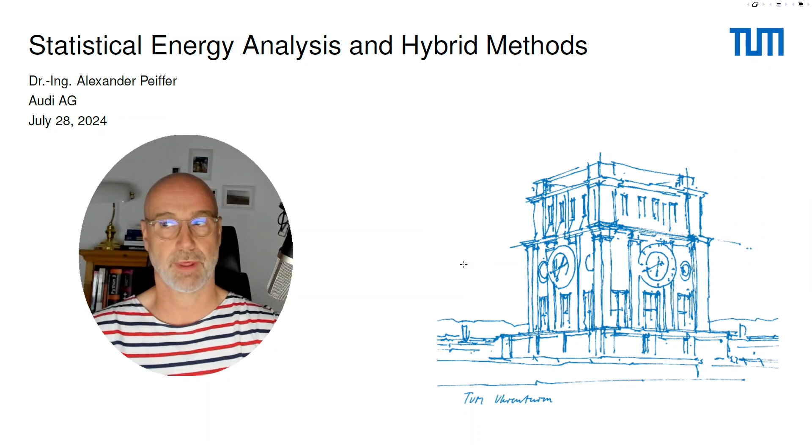The first session is about the introduction and the motivation. So why are we doing this? Why are we using SEA? And why are we using the combined version of hybrid FEM-SEA? So before we start and to get the full picture, we have to talk about the acoustic design process. So what are the goals of an acoustic design process?

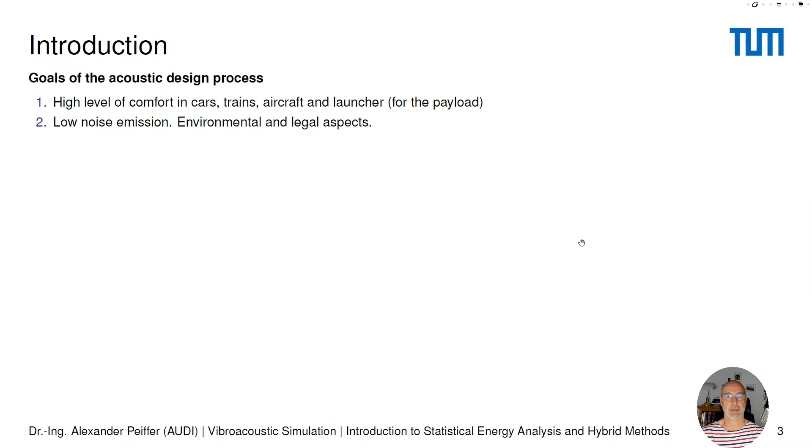So first of all, we would like to get a high level of comfort in cars, trains, aircrafts and launchers, in this case mainly for the payload, namely a satellite. We have to target to design low noise products for emission to the outside, to the environment, and to achieve all the legal limits that we have for specific noise sources.

But, and that's a very important thing in the daily business of a technical acoustician, we have to solve a target conflict all day. Target conflict between acoustics and many other disciplines like cost, weight, space and design. And the reason is that all the other disciplines have, let's say, a competing view in terms of what we need. Good acoustics needs heavy layers, needs space, needs some soft foam material somewhere. All those design decisions that we take are in competition with the other disciplines. So in the design process, we have to communicate with all the others and discuss what is the best solution for the product as a compromise.

Vibroacoustic simulation, what is that? Here's a try for a definition. Vibroacoustic simulation is the discipline of modeling and predicting the acoustic waves and vibration of particular objects, systems or structures. Why do we perform simulation? That's the other big question and the first step into the simulation that will be shown later in the lecture.

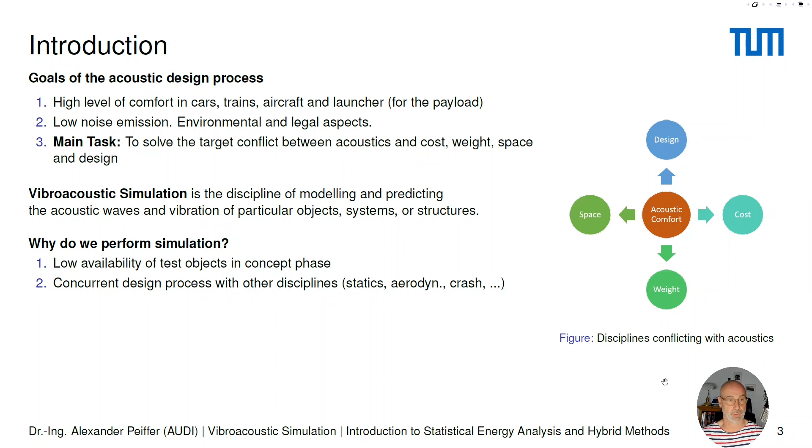Obviously, in the very early design phase, we don't have any test objects. So at that phase, the only choice that we have is to perform first guesses, estimations or predictions about the acoustic performance of our product. Other disciplines are doing the same. Statics, aerodynamics, crash, they do simulation in the early design and layout process. So first of all, we can use those models for our topics, but we also have to give answers to specific questions.

And third, the design and evaluation of noise control can be done by simulation. What is the impact of a new treatment, to use more mass, more space? What is the impact of a new thickness of a sheet of metal or a new beading pattern? And this can be done by using simulation.

And last but not least, a better understanding of tests. Because a test cannot measure everything, and if we have a test performed and at the same time the model available, we can get a much better insight into the phenomena that happened in the test procedure. Finally, we perform simulation to improve the product, but also the design process itself.

And a big but, especially in my experience, simulation will never replace all tests and/or engineering judgment. There's often the statement of zero prototype development. This might be possible in specific disciplines. My personal opinion is that in vibroacoustics, with the complex systems that we have, we can tremendously reduce the number of prototypes, but we will not be able to completely design or develop without any prototype.

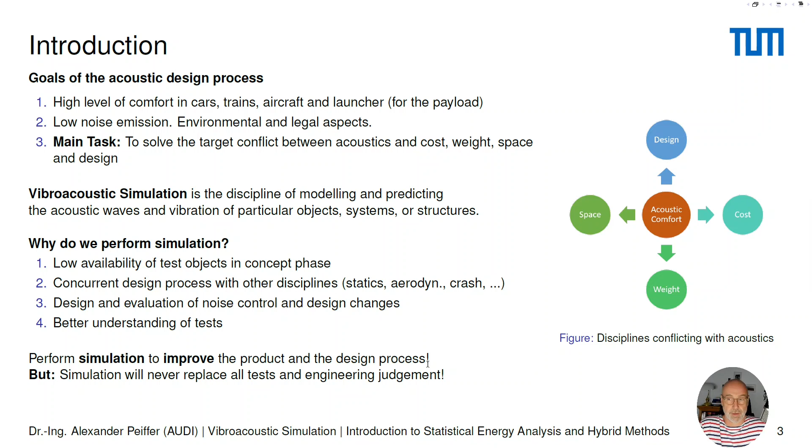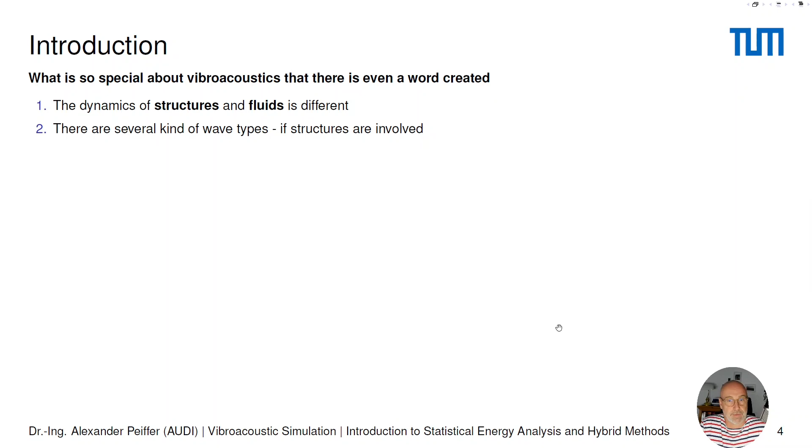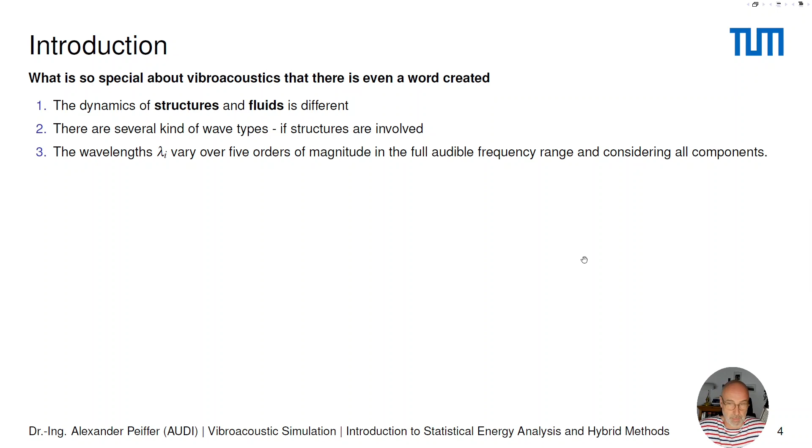Okay, what is so special about vibroacoustics that there's even a word created? One specialty is that the dynamics of structures and fluids are different. So we have a completely different physics behind the wave phenomena in such structures. That leads to very different wave types, especially in structures. You have bending, torsion waves, in-plane waves, and so on. They have a completely different speed of sound. This leads to a different wavelength, which might vary over 5 orders of magnitude in the full audible frequency range, if we consider all kinds of components that we might have, glass, foam, soft stuff, and so on.

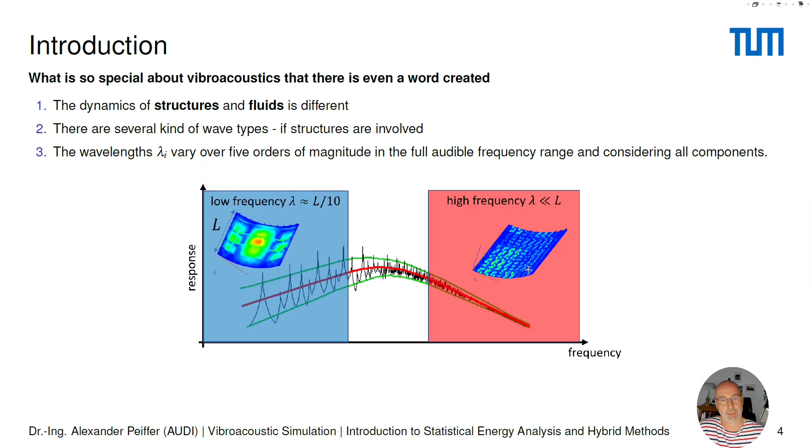And at the same time we have a mid-frequency area where we have kind of a mixed area. So this is a transition area where the transition takes place from the modal behavior to the random behavior. This very high frequency leads to modes that are very near to each other, and this is why we can identify peaks, but they are overlapping here a little bit, leading at the end of the day to a varying but smooth curve in the high frequency range.

So what is the consequence of this? All those different regimes of the frequency range require different simulation methods.

And this is one part of the lecture, because in the lecture here, wow, there's an ant.

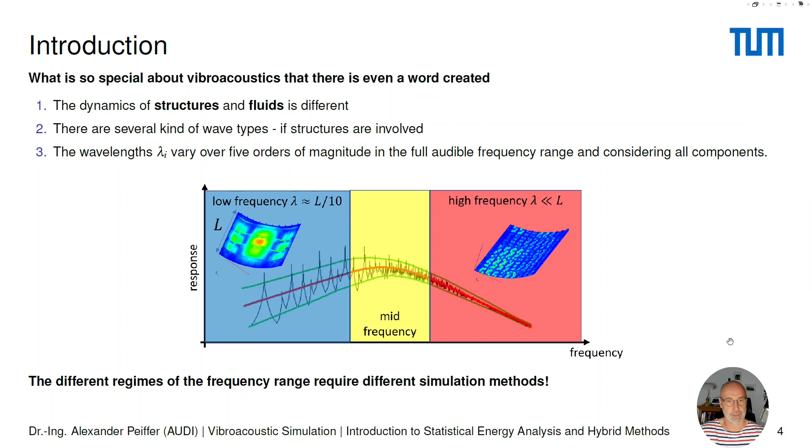So in the lecture here, we will mainly deal with the yellow and with the red area. So to further argue on this, I will show you some examples. One well-known example is the test campaign from Bob Bernhard, who took 98 trucks, which are supposed to be nominal vehicles, and he took them out of the assembly line.

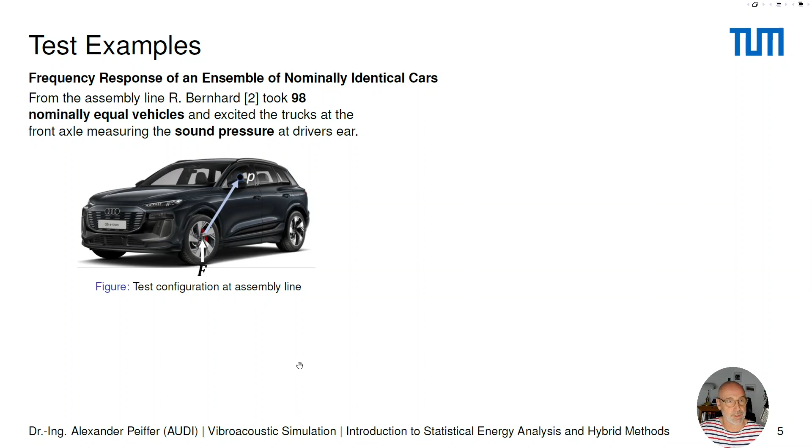And he measured the force at the front axle and at the same time the pressure response at the driver's ear. I don't have the original figure, so what I've shown is a reasonably recently developed car from my company, but in the original I think it was a Ford truck. First of all, he repeated this experiment on the same car several times, at different times of the day, different environmental conditions, temperature, and so on.

And what we can see is that here in the low frequency area, the variation is quite low. But in the high frequency, we already get a variation of our response. So that means the response of the car changes during the different experiments. When he did the same experiment with 98 different cars, this leads to a much higher variation, also in the low frequency range, but to a very high variation in the high frequency range.

So what is the consequence of this? The consequence is that even a similar object, which was supposed to be equal, leads to completely different or strongly varying responses, especially at the high frequency range. So whenever we perform a simulation, which of those 98 cars should we take? That means that in the high frequency range, it doesn't make sense to predict the specific representation of this ensemble of cars. We should take an average and at the same time have a look at the variance of those results.

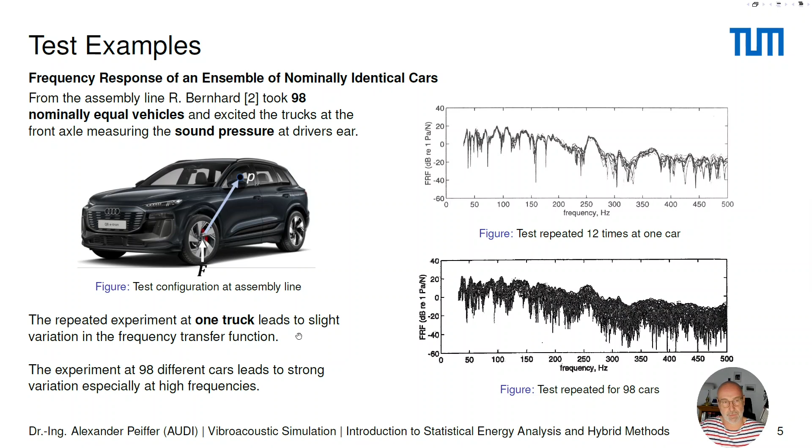A further experiment in this direction was the famous beer can experiment from Fahy. He took a much simpler object than a truck. He just took empty beer cans. To get them empty, I like this formulation, they had to be carefully opened and emptied. And this is not the original figure, again, this is just a similar representation of this ensemble. But I think beer cans don't vary too much between the United Kingdom and Germany.

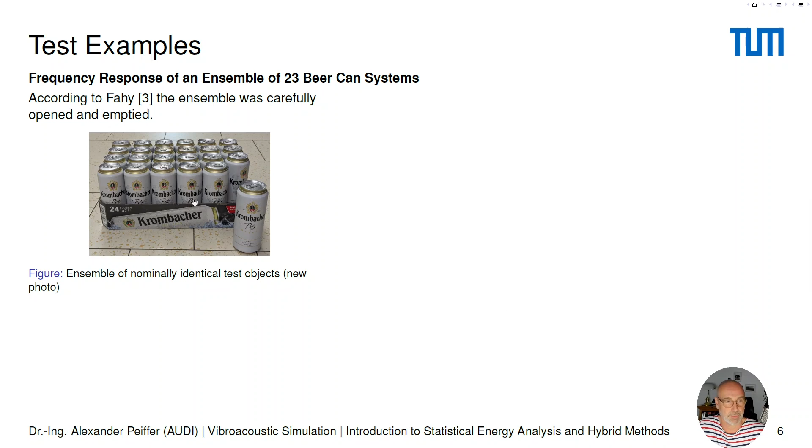The first step in the experiment was to perform the same experiment again on one beer can. And here we already see that there is also this variation in the result, even though the test object is not changed. And that's an important point, and Fahy would like to emphasize that. He said that this was definitely not due to the alcohol inside the can that had to be emptied or potentially drunk. Good.

The same experiment was done with the remaining 23 of this famous ensemble, and here again we see the variation in the beer can results. We see that we have a variation of around 20 dB across all those different cans. So again, even the simple object has a strong variation around a certain mean value, with a specific variation in the high frequency.

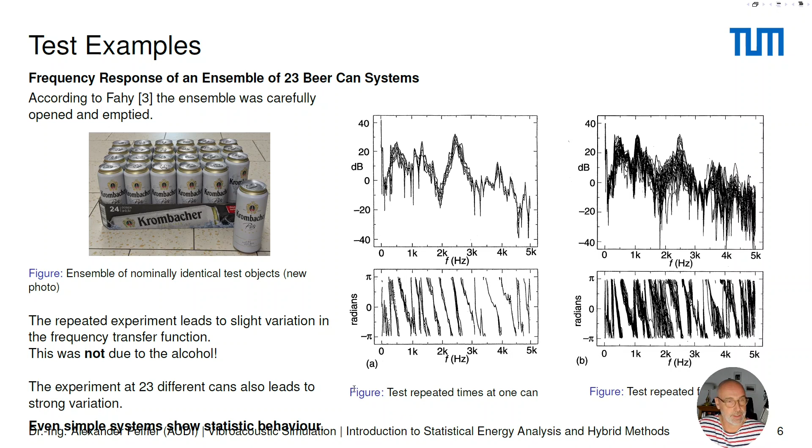So then coming to a simulation example, and this is an example which is more motivation for energy methods and not so much about realization, or let's say explanation. This is just to show you the performance of statistical methods. So just consider two kinds of models. For the first model, the setup is quite simple.

Those are 3 plates, 1 millimeter thick steel plates, and they are arranged in this configuration here. They are excited by a force, and the force is arranged in such a way that unit power is introduced. So 1 watt is introduced in this position where the arrow is denoted. This finite element model is supposed to be the reference. The elements are small enough to give a good representation of the dynamic behavior.

The degrees of freedom here are velocity or displacement. And it's a typical deterministic model representation of such a plate. On the right-hand side, you see the same configuration for a Statistical Energy Analysis, or SEA, model.

And we have here now 3 plates, and each plate is supposed to be a subsystem called SEA 1, 2, and 3. And here we have a power introduction at one specific point where we introduce the same power into the system. The degrees of freedom here in the simulation, that's energy and power introduced.

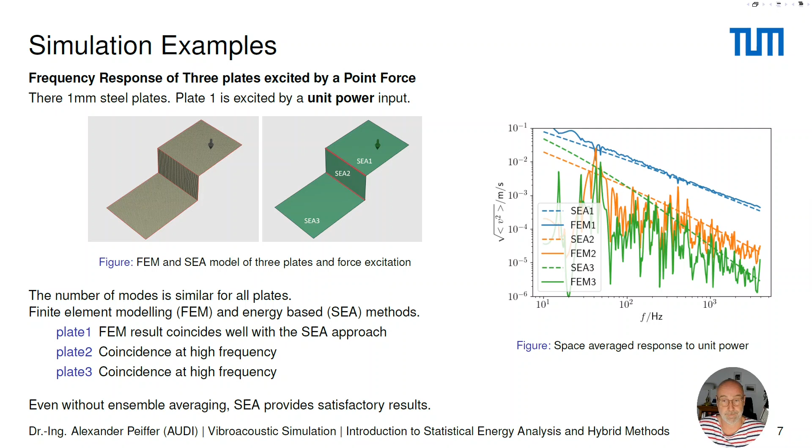Now let's come to another configuration. We take the same model, but now we replace the plate 2 by a plate that's 4 mm thick. So the steel is much stiffer now, and the number of modes is lower than in plate 1 and plate 3. In this case, we have the following effect.

That means that those plates are supposed to be random. So random methods and the SEA method should work quite well. But here, they will definitely fail because we still have the resonant behavior. And this is just to give you motivation. What is the option for that and how can this be overcome?

So for this, we take similar models as before again, which, I mean, this is the FE reference, but you also have the SEA configuration of it. But in the third version, we replace the mid plate by a finite element model. And this is what we call a hybrid FEM SEA model, because we are combining different methods. We combine an energy method with a deterministic method.

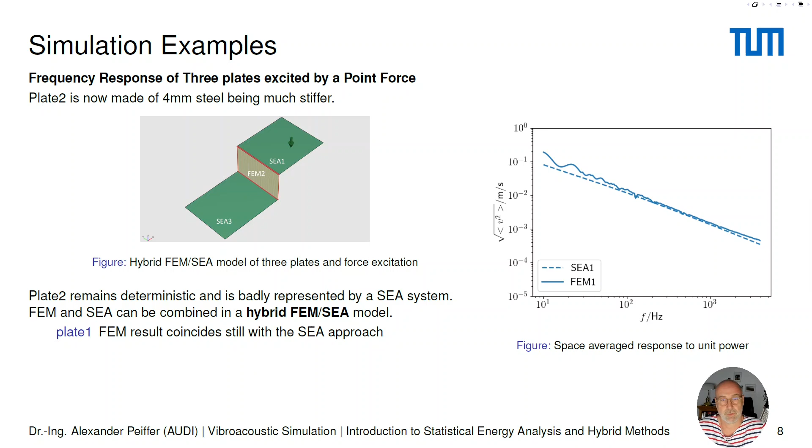So again, have a look at the results. More or less the same result as in the model before. So SEA and FEM are quite well agreeing. The reason is that this boundary does not impact the dynamic behavior of the full plate in total.

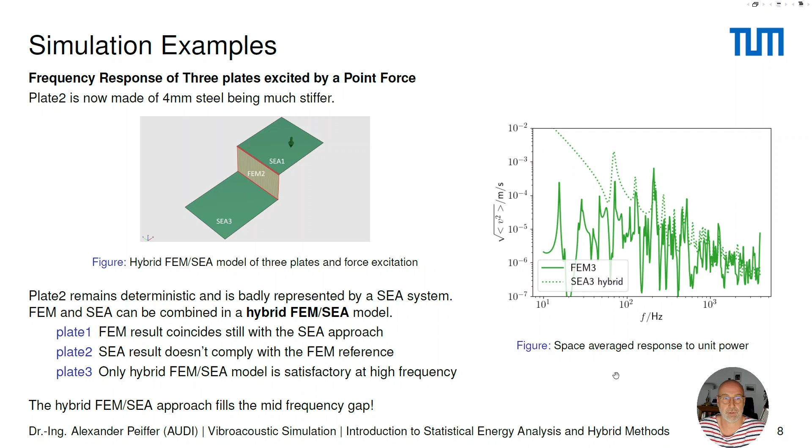This is why hybrid FEM SEA is supposed to fill the so-called mid-frequency gap, where we have no methods available, and this is why I mentioned the yellow area in the example before. So the hybrid method helps to extend SEA to lower frequency by using specific subsystems that are not yet random. Okay, so what have you learned? We come to some conclusions.

At wavelengths in the order of magnitude of system length, the system is called deterministic. We use deterministic numeric methods, for example finite element or boundary element, or if the system is simple enough, we can use alternative analytical methods. At wavelengths much smaller than system lengths, the system becomes dynamically complex, and it is called random. In this case, we use statistical energy analysis, in short SEA, created by Lyon to calculate the ensemble average of system response.

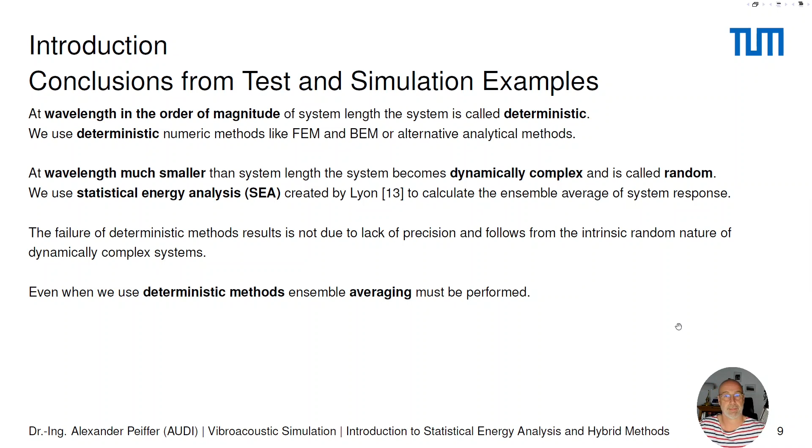The failure of the deterministic models is not due to lack of precision; it follows really from the intrinsic random nature of the dynamically complex system. So again, please remember the example from the truck. Which truck is the right model, which is supposed to be the reference? So even if we use high frequency deterministic methods, we must average. This is important, because very often high frequency FEM results are compared to SEA results, and this is not correct. You have to compare the ensemble average with the SEA result.

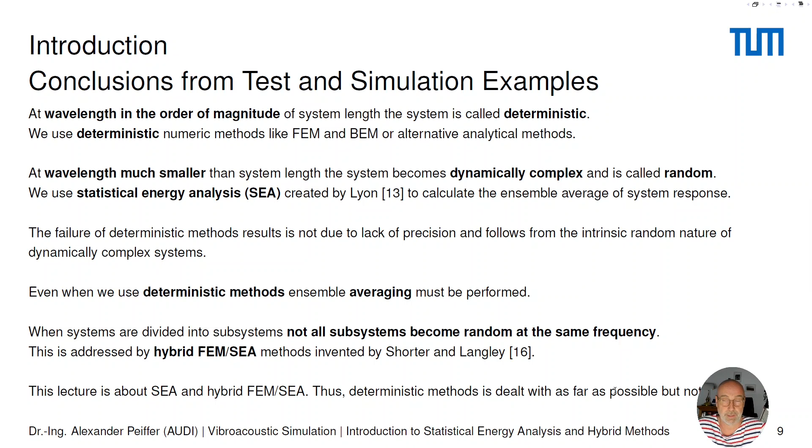When systems are divided into subsystems, not all subsystems become random at the same frequency. This is addressed by the hybrid FEM-SEA method that was invented by Shorter and Langley a few decades ago. This lecture is exactly about both methods: SEA and hybrid FEM-SEA. Deterministic methods are dealt with also, but only as far as required, not in great detail. So this is not a lecture about finite element methods.

When we look at the global simulation strategy, there are a few things to say. If we have to model the full frequency range in acoustics, we have to use various methods, as denoted in the figure. In the low frequency, we can definitely use deterministic methods like finite element or multi-body systems modeling. In the high frequency, we have to use SEA. If some systems are still deterministic, for instance a stiff fuselage panel, we have to use a combination of both, the hybrid FEM-SEA method. The right rectangle in those figures is what this lecture and all the next videos will be about.

The relevant figure that determines if a system is random or deterministic is the so-called Helmholtz number. I've shown it before. It's the ratio between the length of the subsystem and the wavelength. The higher the Helmholtz number, the more we are in the random world. The examples that I will show you, especially the academic ones, can all be followed with a Python toolbox called pyva, Python toolbox for Vibroacoustics, where you can program and try out all those examples shown later in the lecture.

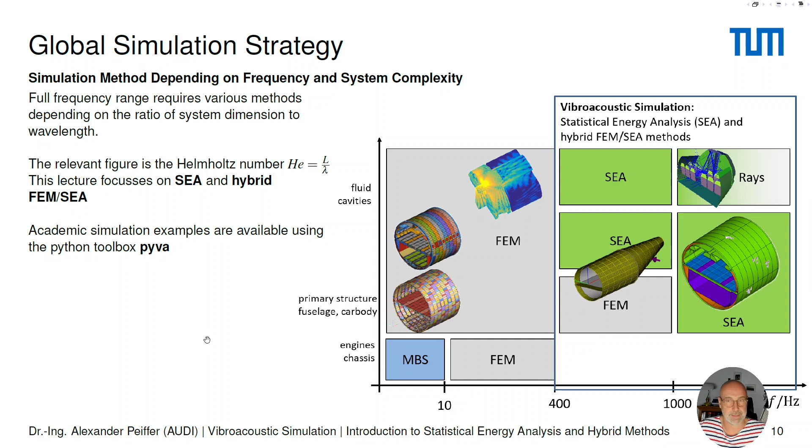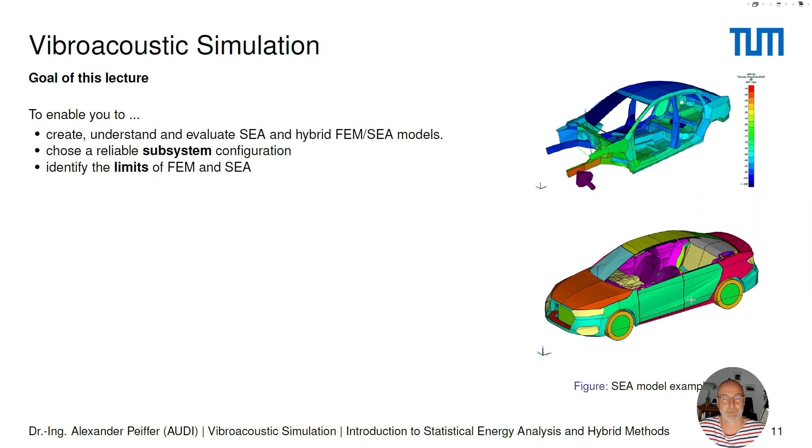What is the goal of this lecture? The goal is to enable you to create, understand, and evaluate SEA and hybrid FEM/SEA models. That's a high goal because you will definitely need some experience with such things. You should be able to create a reliable subsystem configuration. The decision how to subdivide your full car or your airplane into different subsystems is a very important decision in the modeling procedure. You should know and understand the limits of finite element methods and SEA. No method is perfect; they have specific limitations, and it's very important that you know them.

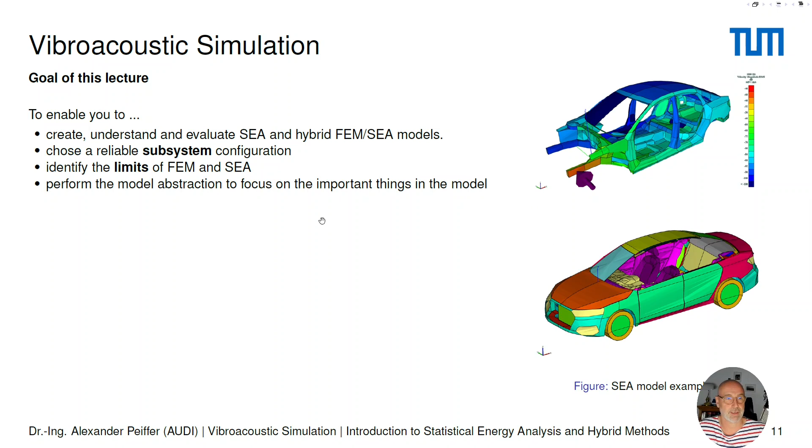And last but not least, you should be able to perform the model abstraction. So to see, okay, do I need everything? Do I need every screw? You can never model everything, and you have to identify the important things in the model. To do so, I think it's worth giving a time frame and global overview of the full lecture and the concept of this lecture.

Another thing is that the lecture is self-consistent. So hopefully you don't need any additional textbooks or whatever. Everything that is shown in the later sessions is presented and explained in the early ones.

We start with a boring thing, a very boring thing, the harmonic oscillator. Why is that so important? Because there we see concepts of energy, of damping. We can understand resonances and modes, energy in dynamic systems, and this can be very well done based on the theory of the harmonic oscillator.

We will extend such systems to complex systems of masses and springs. And at the end of the day, we will excite those systems by random signals. And that's an important thing to understand what happens to a dynamic system with many inputs if it is excited by random input.

The next two steps are dedicated to waves. We start with the simple waves, which are the acoustic waves, because there's just one degree of freedom, that's the pressure. And there we deal with sources, radiation impedance, and so on. Why sources? Because that's the way energy is introduced into our wave field. And we will see what is the relationship between the energy in the wave field and the pressure.

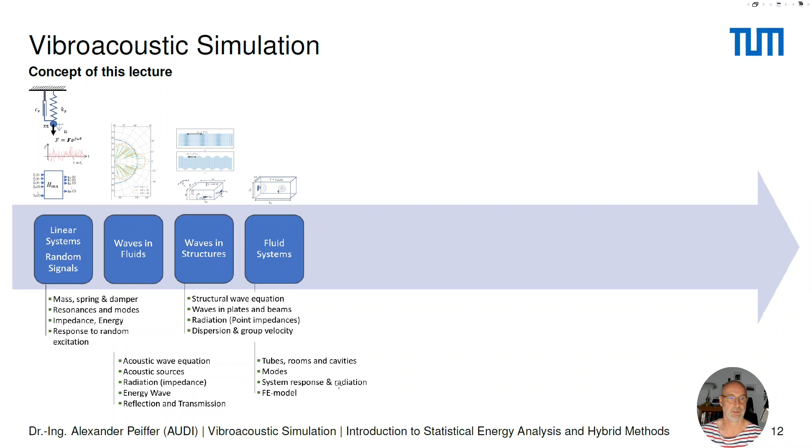We will see how modes occur in such systems, and we will derive some methods to calculate the system response and the radiation of sources into such systems, and also give a short overview of how the FE model of such a fluid system is represented. Not going too much into detail, just to understand the meaning of the matrices.

And next step, structure systems. Here we deal with beams, bars and plates, mainly plates in the lecture case. Again, we talk about modes, what is a good estimation of the modes, and we will have some simple representation of modal system responses and how an FE model of the structure would look like. Again, what is the meaning of the element matrices in a finite element model?

So when we have finished this wave and system topic, we come to random systems, which are the important theoretical construct for modeling SEA. We start with diffuse wave fields, because that's, in my opinion, the best approach to SEA, to consider a random system by the construct of a diffuse wave field.

Here we will see what is the energy intensity relationship, but also, and very important, what is the cross and autospectral density in such fields. And from all this, we will derive the excitation, and last but not least, an energy-based SEA subsystem modeling procedure. So we will first identify what is the global SEA model based on a simple energy and power flow approach.

It's nice to have one subsystem understood, but when you would like to create a full model, you have to investigate the coupling of different systems. And here we go step by step through all the different options of coupling. We start with the coupling of FE systems. Then we will see what would happen if we couple an SEA to a finite element subsystem, and at the end of the day, what is the coupling between SEA subsystems.

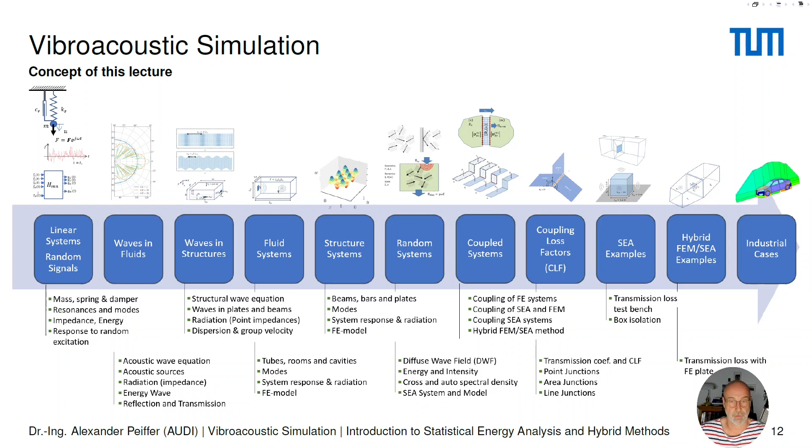And last but definitely not least, I will come to some industrial examples. So here we learn a lot about where we can use SEA in car modeling, in subsystem modeling, aeroplane setups, also specific panels. This is a mix of full-scale modeling, but also some sub-details like sidewalls or back car designs, to give you some practical examples of how SEA can be used, how hybrid SEA can be used, and what are the limits of all those methods. Good. So far for the time frame.

Some conventions and remarks should be shown. First of all, you have the convention here. Every complex number is bold italic. I like that because then it's really clarified that this is a complex number. I don't like this underscript line. So if you see something here in the lecture that's bold and italic, that's hopefully always a complex number. Bold denotes vectors, mainly geometry vectors.

I use a positive time dependence. Just a hint from my side: if you're referring to a textbook, you should always try to learn in the very early phase if it's a textbook using positive or negative time convention. That helps a lot because all the formulas look slightly different if another convention is used. When I use curly brackets, that's a vector. If it's a rectangular bracket, it should be a matrix.

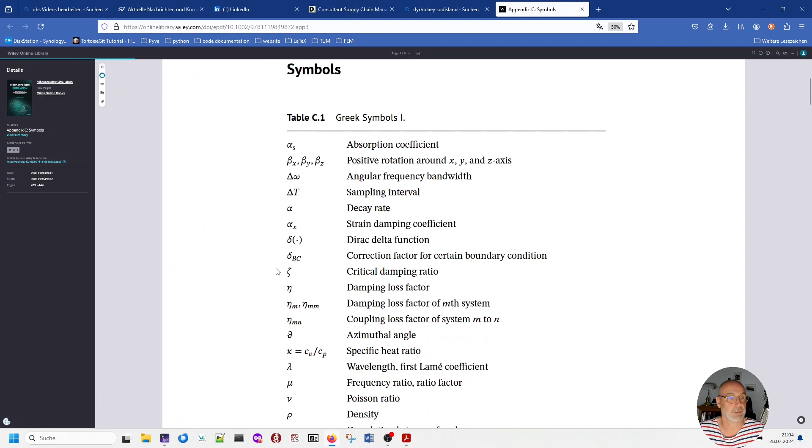You can find all the symbol conventions in the free symbol chapter of my book. So it's linked here. This is how it looks. You see all symbols are mentioned and given, the conventions are given. And I think this is quite helpful if you are not totally sure what is the meaning of a specific symbol.